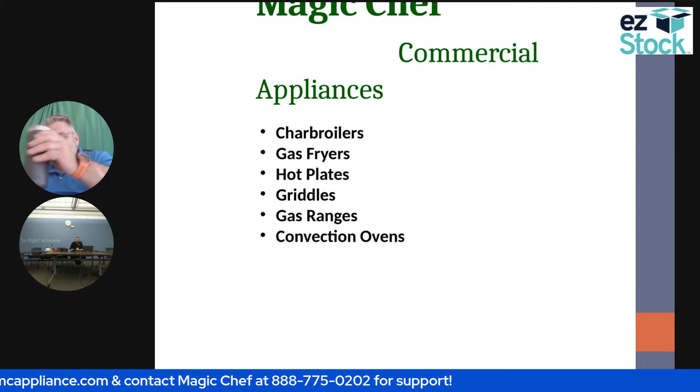You'll see these on a lot of smaller restaurants where they're throwing burgers and steaks on them, something to get those grill marks. They're going to have the cast iron grates that go on top, so you'll have a constant heat source, and they hold heat very well.

So a lot of these, if you have a good range, those are also available for a food truck. Absolutely, could be something these guys use. It would be portable, and me being the servicer, I would have to go to the food truck, depending on where it's at, whether it's at the house, a location, or on site.

So that's something a technician would have to be aware of. Sometimes you'll have the benefit of having these food trucks come to you, so if you have a shop, have them come straight to you and you'll be able to make the repairs there. If not, that's fine too, you'd be able to locate the food truck and work on it at any time.

Also, any of our cooking equipment ranges from a 24-inch all the way to a 48-inch, so there are smaller units that could fit in those food trucks, and we also have the large appliances that'll go into a full-size restaurant.

So here's kind of your major retailers. All of our Magic Chef appliances are going to be available through Home Depot, Amazon, Walmart.com, and we also have Lowe's.com, so you'll be able to find those there.

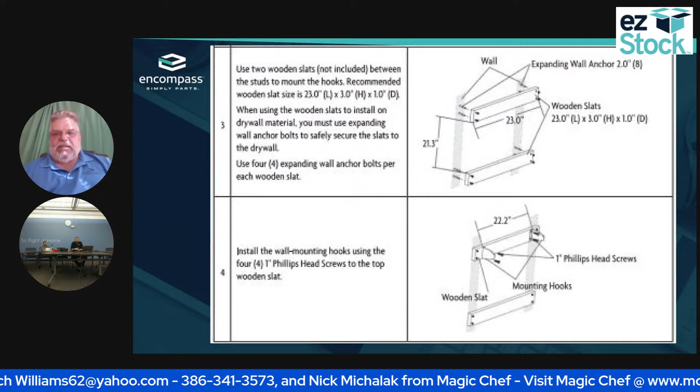Along with the supplied mounting brackets, it can be installed to the wall directly using the existing wooden studs. Of course, you're going to have to space it out so that you can get it and put the brackets on it. Here's kind of how you would do it, this is what is recommended by the manufacturer. We're going to use 2 wooden slats that are not included, and between the studs to mount the hooks. Recommend the wooden slat be 23 inches long, 3 inches high, and 1 inch deep.

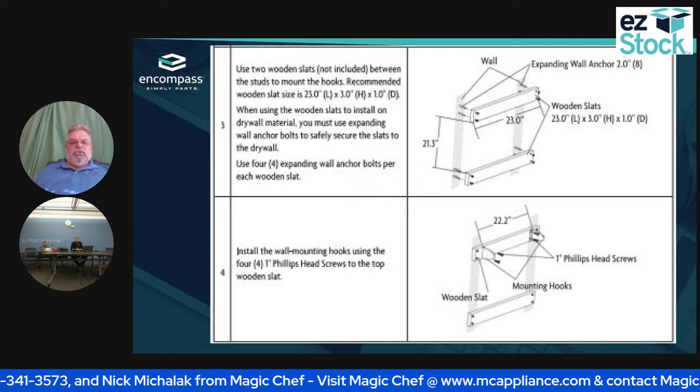When using the wooden slats to install into drywall material, you must use expanding wall anchors. Of course, that goes without saying. Once again, I have to make sure that I'm going to hit a stud.

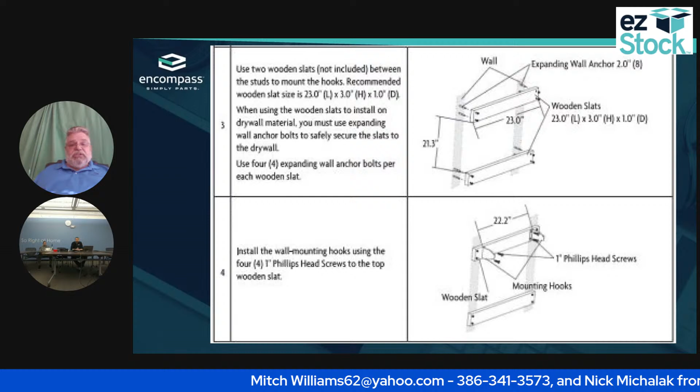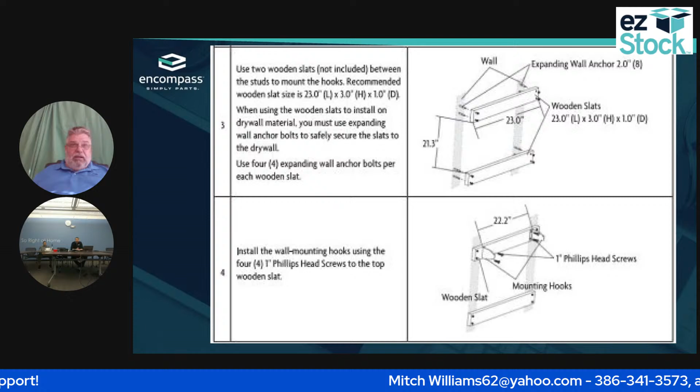If I have this set up and I'm just using the wall anchor, I don't like using a wall anchor for this reason. If I have a dryer on there, even though it says use an expanding anchor bolt, I've got anchor bolts that supposedly hold 75 pounds, but I wouldn't use that to attach it, because that is going to be a huge problem later down the road. It's probably going to pull off out of the wall if I have not hit a stud.

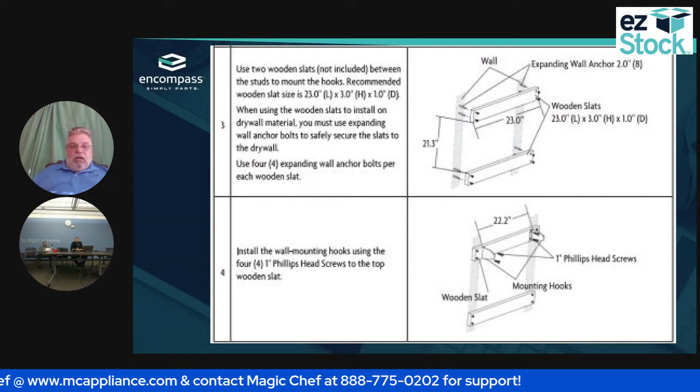So we're going to install the wall mounting hooks using the 4 one-inch Phillips head screws to the top wooden slat. You see it right there on the right-hand side. This is a visual of that. Okay, we're going to then install the 4 wood screws to the bottom slat. You can see it right there where they're attaching it.

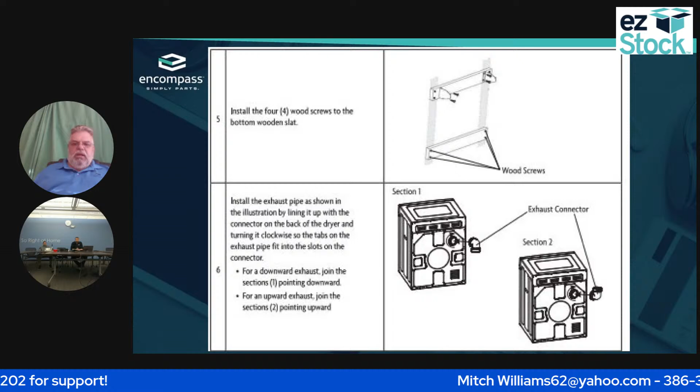Okay, then install the exhaust pipe as shown in the illustration, lining it up with the connector to the back of the dryer. So you see, they have it done one of two ways. It installs either down or up. Now, one thing to remember is if I'm installing it up, I may have an issue with a little bit of lint blowing around, as you do with any dryer.

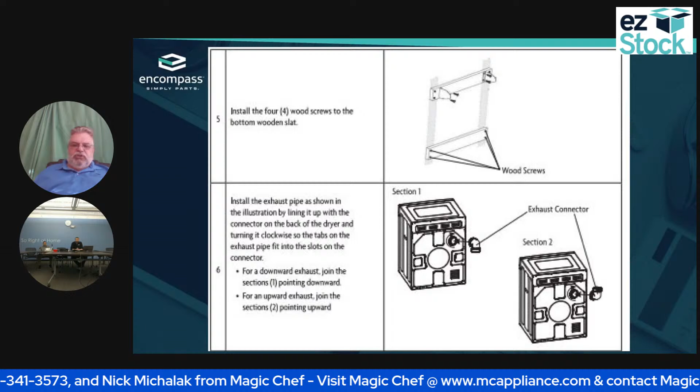Okay. Do you want to jump in here, Nick? Have I done a good job of what you wanted to convey with this?

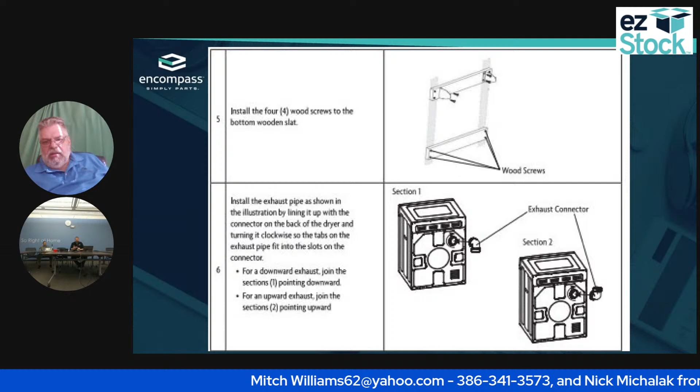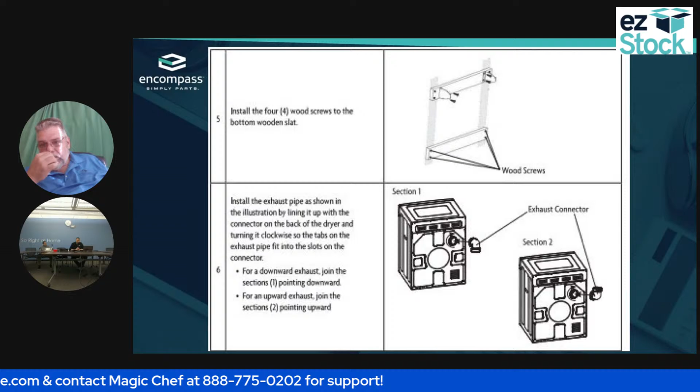Fantastic. So regardless of whether it's up or down, up, like you mentioned, you will have a little extra lint that would pass through. But I'm sure we'll get into the inner drum lint filter. The unit does have a filter inside the drum that should catch any lint in the first place. But if customers don't have that on, or if it's not installed properly, lint will end up coming out of that exhaust connector, so they want to be prepared and ready for that.

Okay, so the spacers are required when installing the unit to the wall to allow for the necessary ventilation efficiency. Once again, if I don't have this installed, I have no way for this to vent. So it is imperative that I actually install these spacers so that somebody can't push this dryer all the way to the back.

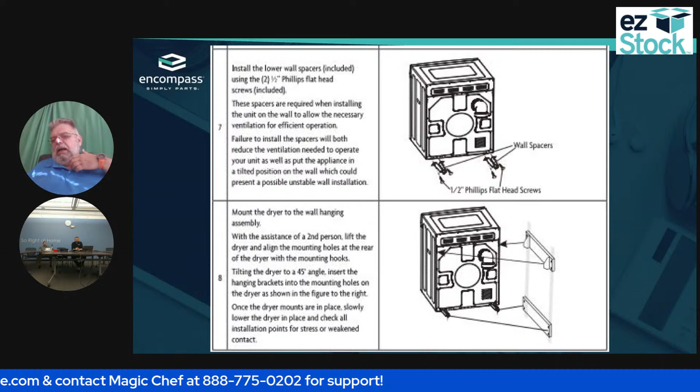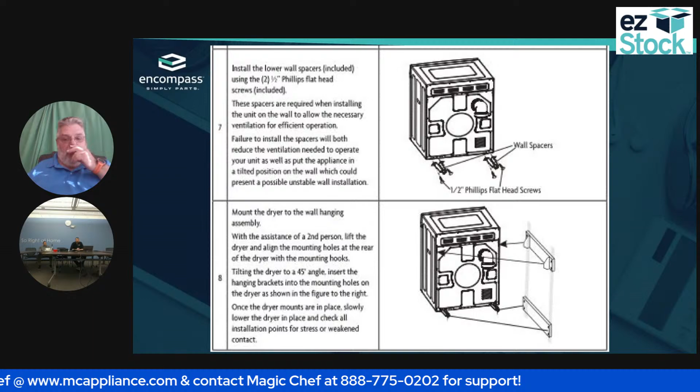So if I'm going to pull this down, I need to make sure I've talked to the customer and I know that this is actually installed above something. That way I know I need a second person to help me take it down, because it's not hard getting it down—the hard part is getting it put back up. And if this is mounted up with a washing machine underneath it, I definitely need another person to help me take it down so I don't damage anything.

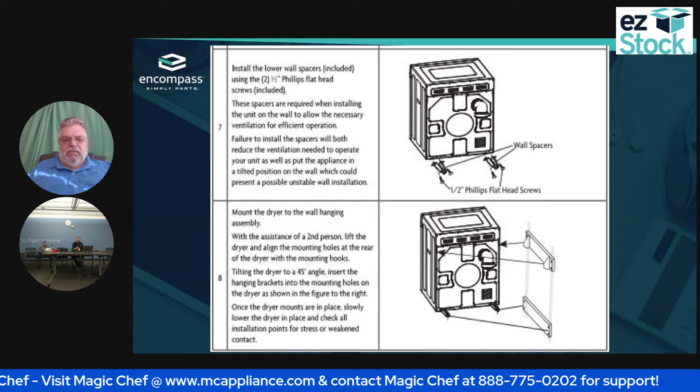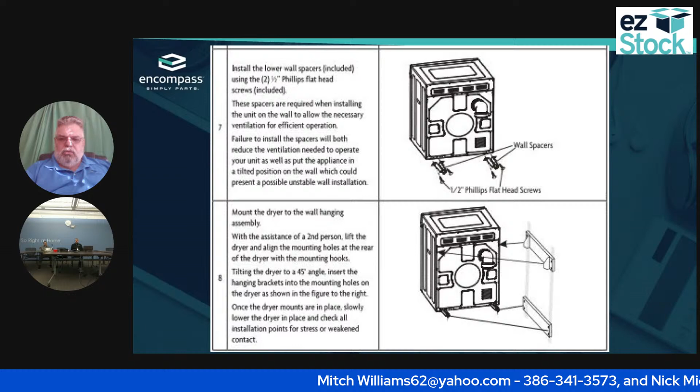Okay, so I'm going to tilt the dryer to a 45-degree angle, insert the hanging bracket's mounting holes into the dryer as shown in the figure on the right. Then the dryer mounts are in place, and I'm going to slowly lower that dryer for installation. You see those two wall spacers—that's what I'm mounting that bracket to, so that it does not allow me to push it back.

I'll tell you that whenever I'm using something like this, I love that de-wrinkle feature. Let's say I've washed and dried my shirt, hung it up, but it's still got some wrinkles in it. I can put this into de-wrinkle, it will start, de-wrinkle my clothes, and then it comes out fresh. The only problem is if you live in Miami, it's a little hot, but that's okay too.

Once I hit de-wrinkle, I would hit the start button, let it run through the cycle, and it would give me a buzz. I can go pull my shirt out and it works great. Could be a pair of pants too.

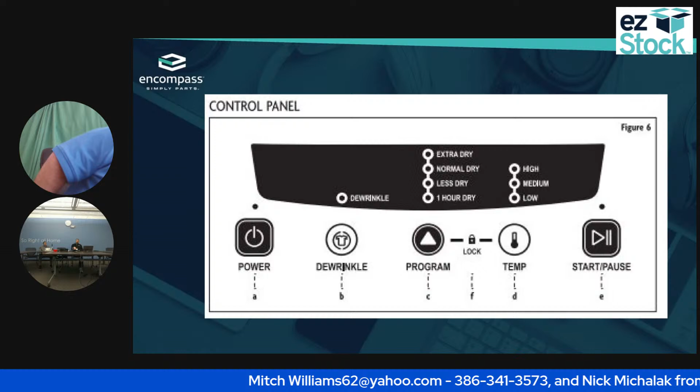One thing I also wanted to point out is the control panel has a locking feature. Customers with small kids can lock this control board so they're not starting the units. But all of the dry cycles are going to be based on humidity, so it's going to pull the humidity out of the system.

So extra dry, normal dry, and less dry, you're going to hit that 35 to 40% humidity level. The 1 hour dry is not going to go based on humidity, it's just going to go off of that high heat.

Good catch, and that was going to be my next thing, was to talk about the lock, which is great. Okay, so here's kind of just the basic - this is actually from their customer installation guide. All I did was pull the information off of theirs.

So of course, turn the power on by pressing the power button. The unit will beep, and a light above the button will come on, indicating power is being supplied to the dryer. Then we're going to go to the default setting. If I don't want it to be extra dry and high, I will need to program that out, just like what we said. Once I get done, I can just press the button and turn the power off.

De-wrinkle - this is what we had talked about. Press the de-wrinkle button to select de-wrinkle for the program. Added to any dry cycle, the program will add 10 extra minutes of air dry cycle after the selected drying program. I'm going to use this during only air cool, which is just an air cool feature that is in there.

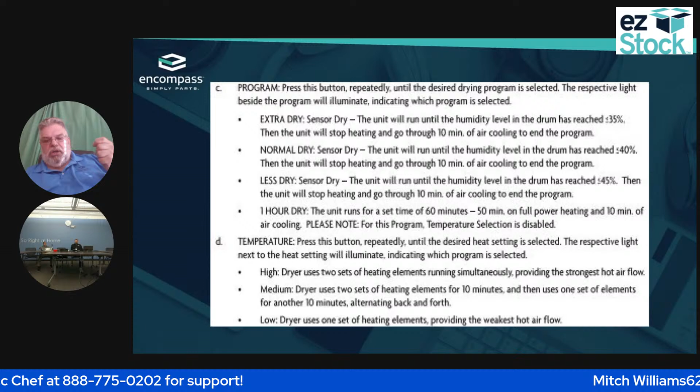That runs for a set time. So it will run an extra 60 minutes, 50 minutes on full power heating, with a 10-minute air cool period.

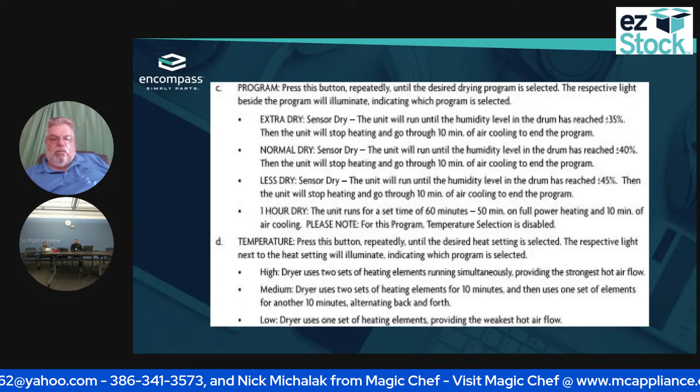Okay, so the temperature, if I'm going to do that, I can go and I've got high, medium, and low. We've got all of that. We have a start and pause.

Let me ask you this, Nick. One of the things in my career, we used to have customers bring stuff to our shop. This would probably be a good thing for them to bring in. So if I'm a customer and I wanted to bring it in, what is the difference in the labor rate between going to the customer's home and having it done versus the customer bringing it into my shop?

Yeah, for carrying it in home there's really a small difference, about a $20 difference for actually doing the work on it. But realistically it'll save you the time, the gas, and the effort to go to the customer's home if the customer's willing to bring it into your shop. So if you have it in a shop, you have to look at it as convenience as well. They're trusting you to drop that off and get it repaired.

Right. So being a technician and having a shop where we did shop repairs, whenever I do this I need to go over it with a fine-tooth comb. I probably want to take pictures whenever it's being brought into the shop. That way, when the customer comes back and says 'hey, there's a dent right there that wasn't there,' I can revert back to my pictures and say, well actually yes Mr. Customer, it was there, here's the pictures I can show you. Because customers don't pay attention - they can damage it before bringing it to you. You just need to cover yourself.

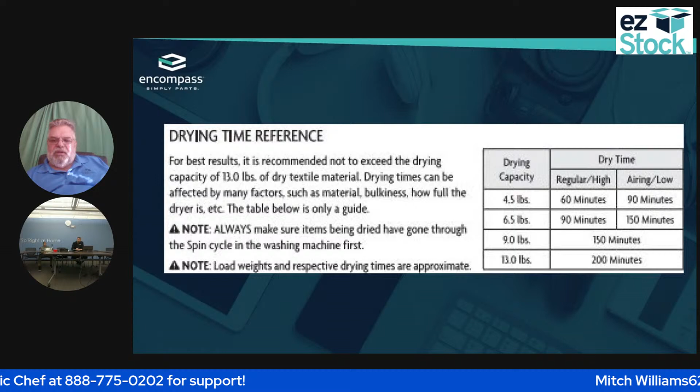Okay, so that's something the customer needs to be aware of - it only beeps after, which is what I thought. Although it would be kind of cool if it did it before and after. But that gets into the engineering, and I don't want to mess with the engineering.

Okay, so Nick had mentioned the lint filter assembly. It's very important that this gets cleaned. If I do not clean this, I'm never going to get things dry. This is just like any other lint filter in any other dryer - if we don't clean the lint filter, we have problems.

Now I'll tell you a perfect example - my dad loves to throw in dryer sheets to keep the wrinkles out. So if I use a whole lot of dryer sheets with this, I am going to have to clean it more often, because what will happen is it actually turns into a buildup that will not pass the air through the lint filter.

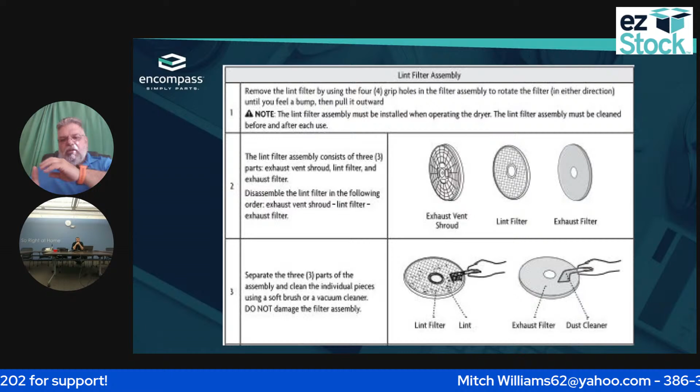So I'm going to have to take this and clean it with my cleaner. After that, I need to go ahead and put this under a little bit of water just to make sure the dryer sheet residue is not attached to the lint filter itself. Okay, that's just a tip you need to be aware of, and that's with any dryer.

My nephew called me, and he evidently does the same thing as my dad - he just throws his dryer sheets in because he says it helps his clothes smell better. But after a while you get this buildup, and you have to go in and clean it. What do you clean it with?

There are various products out there. The easiest thing I can do is take my spray bottle with a basic cleaner in it, spray it, and make sure I totally wash it off. You could also use something as easy as white vinegar, about the same thing you'd use to clean your coffee pot with, and that will help get rid of the buildup from the lint.

Anybody have any questions right now? Anything you need to add, Nick?

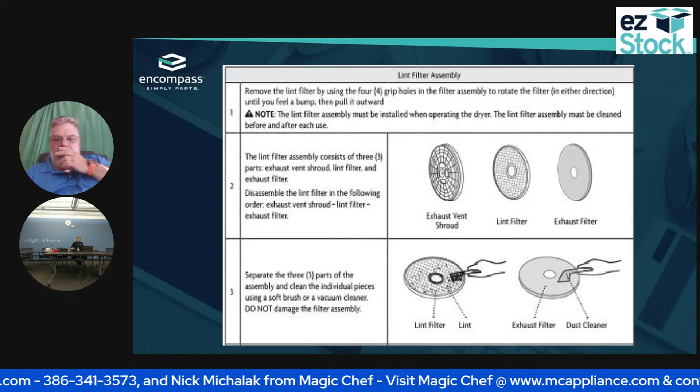Just one thing I want to mention here, a little troubleshooting tip. The unit has a built-in TCO, so if the dryer overheats, it will shut itself down. So if I arrived at a customer's home and they said the unit only runs for a few minutes and then totally goes blank, I'm going to check this lint filter. There's a good chance a lot of customers, especially with a ground level unit, aren't going to bend down all the time to clean it.

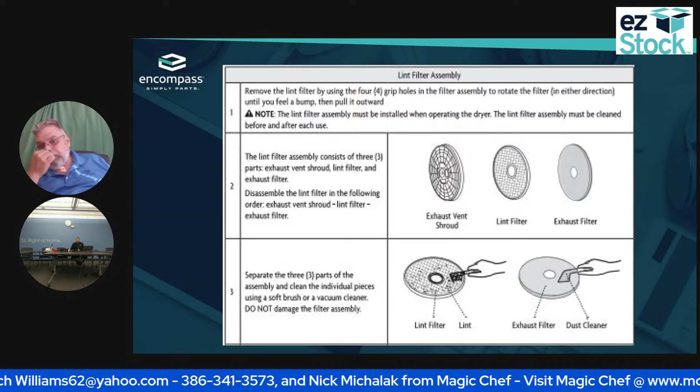So we want to make sure we educate customers to clean these lint filters every 2 to 3 loads. If it is built up, you're going to have no airflow coming out of the back of the unit, and that heat is going to make the unit overheat and shut down. So I'd be checking this lint filter first for any overheating issues.

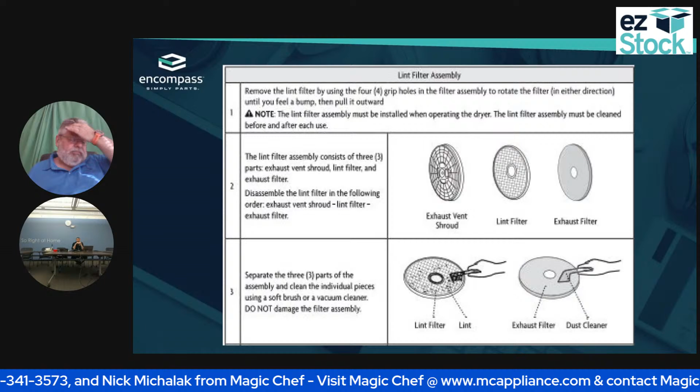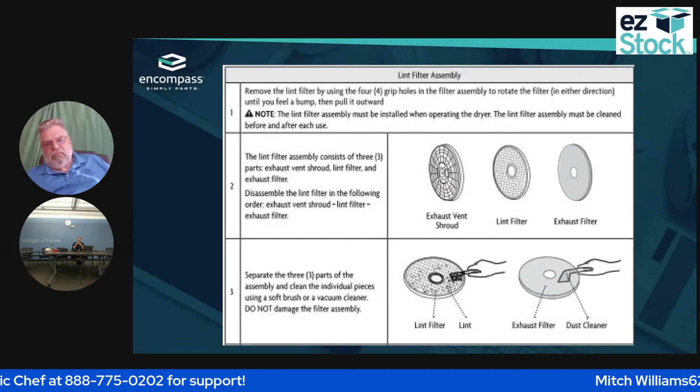This is a resettable thermostat, correct? Correct - they could reset it on the back of the unit, they'd have to pull the plate off. So if a customer calls us saying the unit's overheating, we're going to contact a service technician to go out there and do it for them.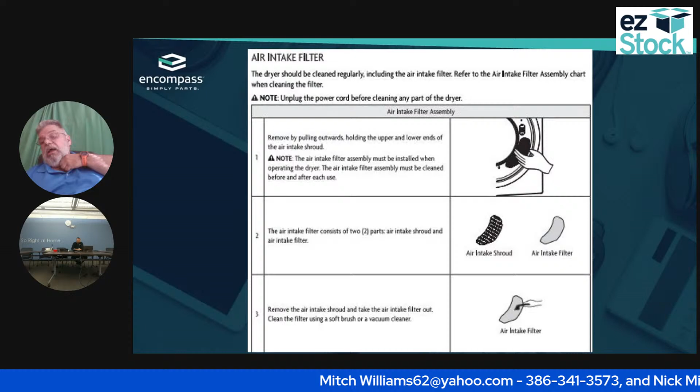So I'm going to remove that shroud, then take it and clean it. You can see it comes with a little brush. If I'm a technician, I'm going to use a soft bristle brush to take care of that.

Does anybody have any questions? I heard something beep, and I just wanted to make sure I had everybody's question taken care of.

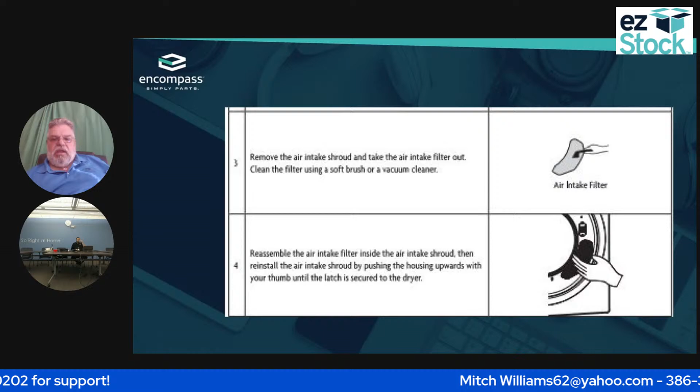So I'm going to remove the air intake shroud and clean the filter using a soft brush or a vacuum cleaner, then reassemble the air intake. This needs to be done about every 3 or 4 loads, right Nick? Yeah, around that range would be just fine. So the customer will actually have to get down into the dryer, which is what Nick was talking about.

With this being a very small dryer, this would be a good time to have a child that's old enough to be able to bend down and get almost into the dryer to pop it off.

Okay, so our buttons don't work. If I have this problem, what are my possible causes? The dryer's not plugged in - that pretty much goes without saying, because nothing's going to work. The circuit breaker is tripped or the fuse blew. Check for the circuit fuse or the tripped main breaker.

The door may not be closed. If the door is closed and everything else is working, the next thing I'm going to do if I'm a technician is actually check this door switch to make sure that it is operating properly. Then we have the power button was not pressed to turn the dryer on - that's one of the other options. Like I said, many of these go without saying.

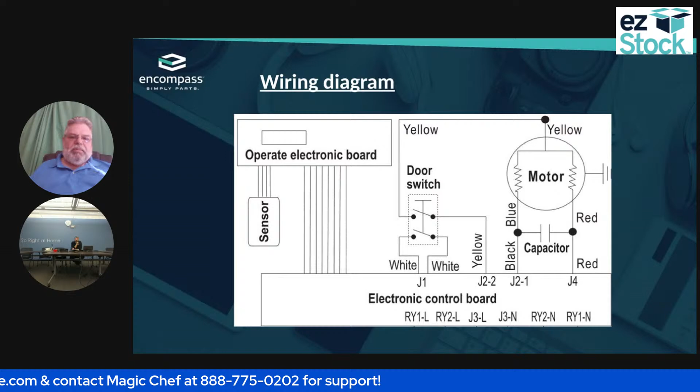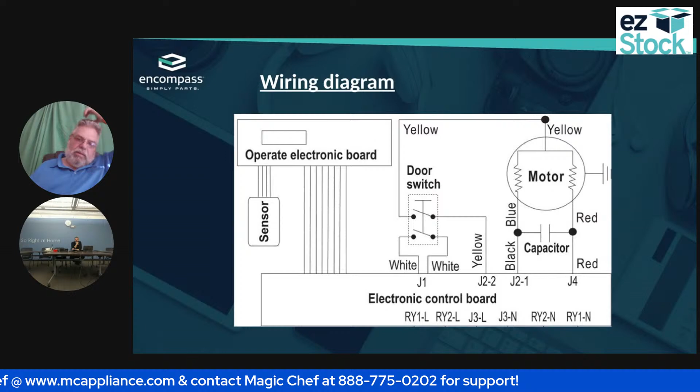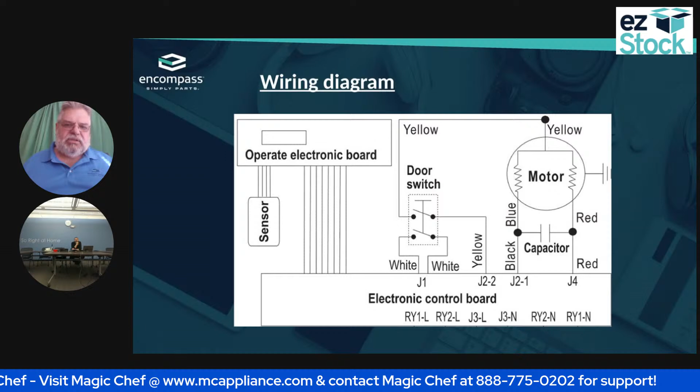Is this a ribbon connector that goes in the touchpad? It is. Okay, so everybody knows the trick, right? If I'm not getting what I should on this ribbon connector on the board, I'm going to go to the ribbon connector, remove it from the board, take it, and find myself an eraser, like a pencil eraser. I'm going to clean it, and then insert it exactly like it was when I pulled it out. A lot of the time that will fix my improper board.

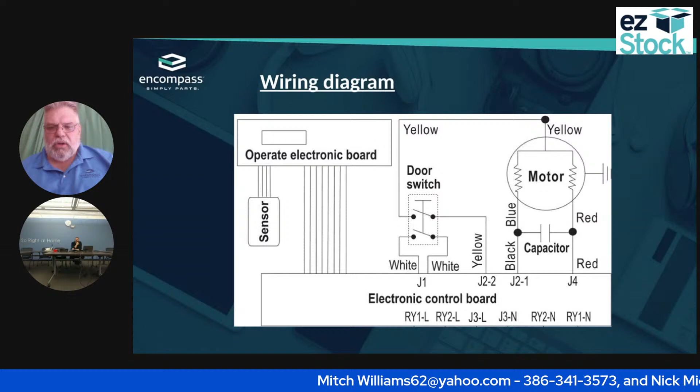Okay, so if there's no other questions, we're going to go ahead and move along.

Here's the bottom side of that, of course. Sorry, I had to cut it in half. I had forgotten that. There's a power source, which is 110 volts. You do have a linkable fuse. Then I'm going to go to the thermostat. Those are the two brown wires.

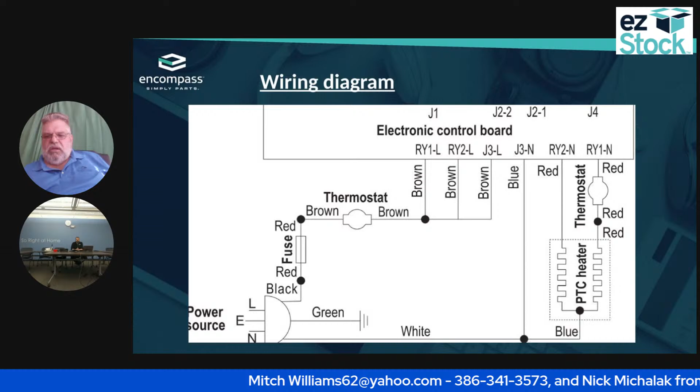Then we have the white wire, which changes to a blue wire right there at the J3N connector. Okay, that changes to a blue wire. Then that goes to the PTC heater. It has another thermostat that is going, so this unit has two thermostats in it. Of course, those are all red wires. It's 110 volts, just like we said. So that is exactly what the schematic shows.

Once again, there's no response whenever I press the buttons. Is it a socket plugged firmly into the wall? I would hope so. I would know that because I have no power to it anyway.

The drum doesn't turn. Once again, is the door closed? Is the door switch working? As a technician, I'm going to look for that.

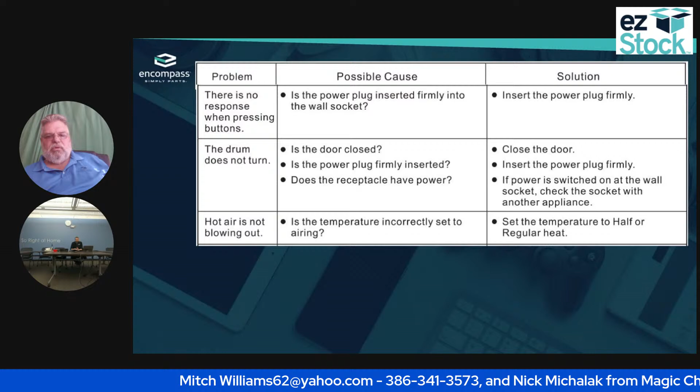Is the plug inserted? I'm going to know that because I'm going to have something in the display. If I don't, then I can check that. Does the receptacle have power? That goes without saying. If my unit is plugged in, then I'm going to take it out and check my receptacle.

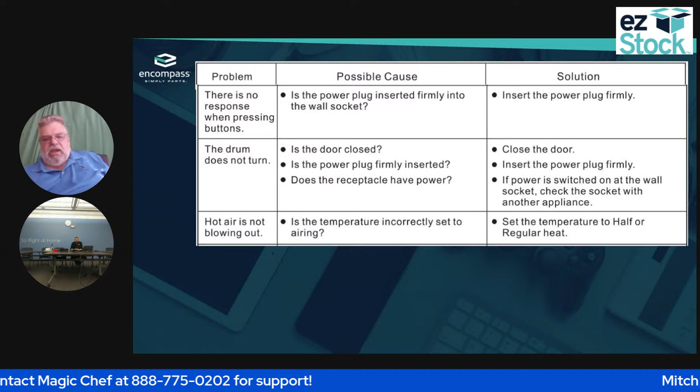If I have no hot air coming out, the first thing they want you to check is the air. So I'm going to put it on a cycle and check it. I'm going to select the air temperature, probably the high setting, turn it on, and see if I get warm air.

What's one of the things with this being a 110 volt unit? We want to discourage anybody from adding clothes after the unit is started. A lot of the time, if I'm already halfway through the cycle, I don't want to add anything.